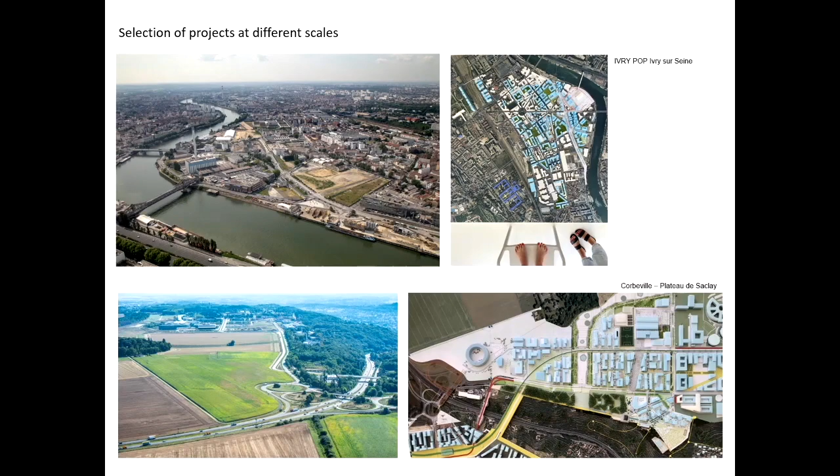I'll show you the different types of problematics we have, what makes it interesting for me. This is Fives Cail. This is a ZAC too, of 25 hectares, with 17 hectares of one building, a former industrial building that the city bought and wants to transform into a new neighborhood. The first phase was done by AUC, another urban planning office in Paris, and we won the second phase. How does it work? When you do an urban project in Paris, we only have a contract for, let's say, maximum 12 years, and more now, or then 5 or 6 years.

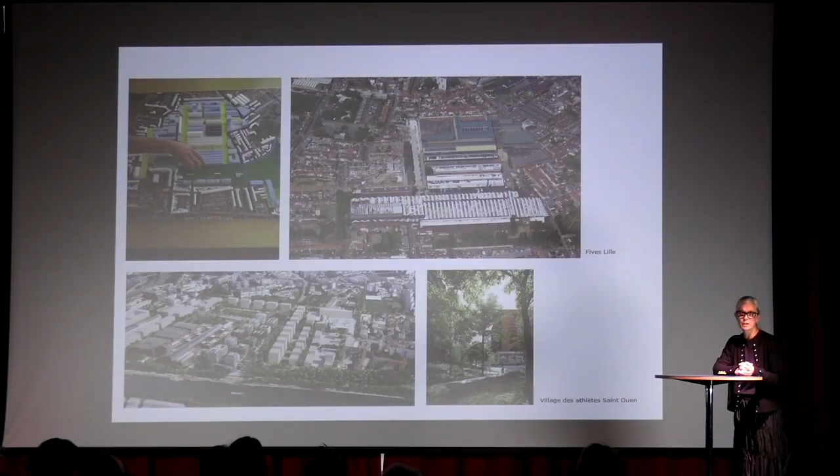And then below, it's another scale - the scale of the Olympic Village. We are an urban planner and architect who were coordinating through a competition, and now we are working on site with 6 architects for doing this city block.

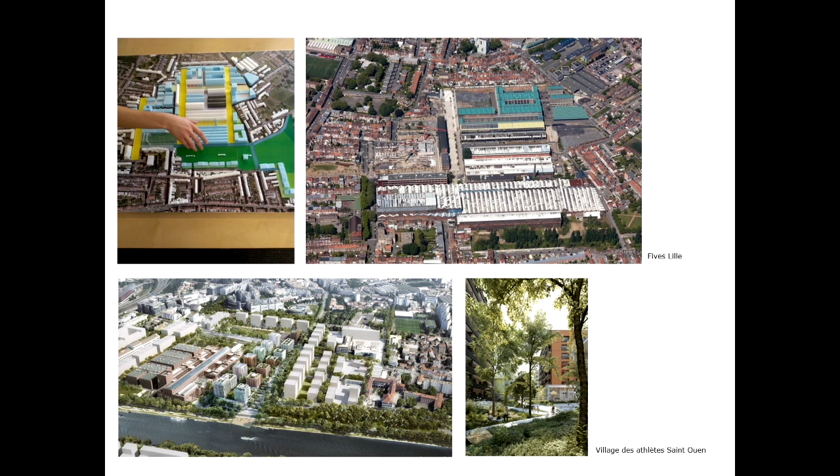And this is the whole part of the Olympic Village, and there is another part on the island. This is where I am coordinating architects as an urban planner, but within the plan that was made by Dominique Perrault's office and Agence Terre doing the landscape. I was then working for 3 private promoters to make this project. And then we are also working on an architectural scale.

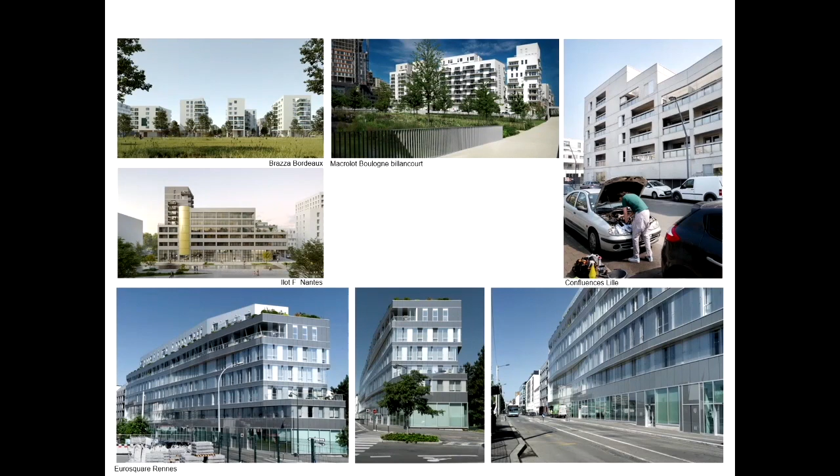I think it's important to know that, and I think it's important we do both, because I think the attitude of an architect and an urban planner should be the same: to try to find the potential of the site, to build up possible scenarios, and not to determine the space, but to make sure that people can inhabit their space like they imagine it. I discovered after 1 year at Villa Medicis that, in fact, we do not use space as it was designed for. We always detour space and we always appropriate space. It's also a sort of way of being resilient.

If I now come to Ile de Nantes and the process, Maria asked me to explain how it works, not just the project. So I made this lecture in a way that you can understand what we did, how we did it, what tools we had, how many people were involved, and how we worked.

So I call this lecture Designing Dialogues, because I think urban planning today is about designing dialogues. It's about negotiating, about talking with a lot of things: with the layers of the city, the context, the physical layers, the framework below, the physical context, the people, social, economical, political items—all important to build the history of the site—and also with the different actors involved with the site.

Especially in 2010, we started to think about water management and about continuity of ecological systems, biodiversity. But today, with the ecological transition and climate change, we've reached a sort of acceleration where we now have to take care of the CO2 footprint, which we have to reduce by 50%.

That has major changes in the form of the buildings and the way you construct, and also the construction price and the quality you want to have as an architect building the urban environment. And not to forget the people who are living there, and how you make an inclusive city. Perhaps this isn't the issue in Norway so much, I don't know, but in France it is—we have a big gap between immigrants, very poor people, and the people living in Paris who are paying a lot of money for their apartments.

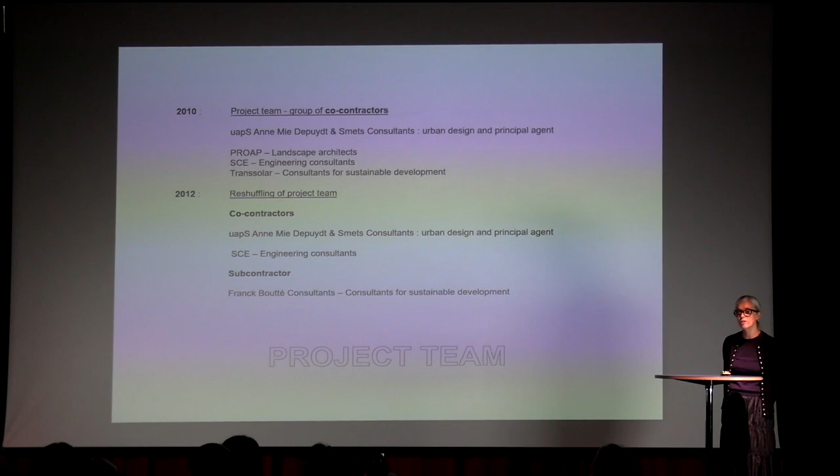And I became, with the office, the landscape architect, which is really weird. We had to do all the public space, but we didn't do all of them because I refused. We did competitions afterwards for other landscape architects to fulfill the role of the public spaces. So after the reshuffling of the team, we went on and did the project.

And then the Samoa - what is the Samoa? This is very important for you. It's an organization, a society that helps the metropole of Nantes do urban planning. They have a budget, a team with a director, a deputy director, project managers, very young and interesting people. And they have a budget to buy the terrain and sell it to private developers, ensuring the urban planning will be good.

They have a budget called the ZAC, and this budget is the budget for the public space. In order to get that budget, we have to respond with density, because when you sell your ground, you sell it according to the number of square meters you're going to build on it. So the money you get from the ground helps us do the public space.

What was the major change between our period and that of Chemetoff? What Chemetoff has is a very good issue, and what we also do is start thinking urban planning from open spaces, and we start to build a lot of these open public spaces. He had the budget to start doing a lot of public spaces without having constructed or sold terrains. But then in our period there was a crisis in all of France, and the state didn't give much in subventions anymore to the cities. So through this crisis, we had to first do the private buildings before doing the public spaces. That was the major change.

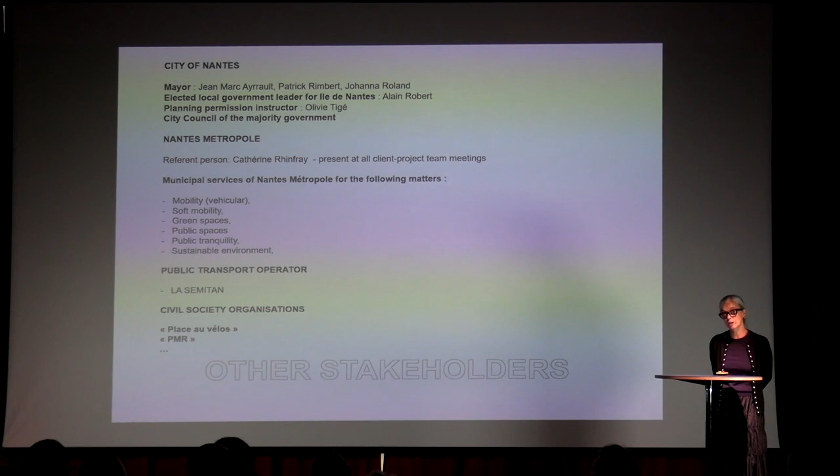But it's not only the Samoa that is our client - we also have to deal with the city of Nantes and Nantes Metropole. I had three mayors during this period: Jean-Marc Ayrault, and when he became prime minister he was replaced by Rimbert, and then Johanna Roland got elected. Rimbert was very much into the project, the strategic planning. Johanna Roland is less present. It's not the same way today of dealing with politics as it was before. You have to know I met Ayrault every month, once a month, in his cabinet, just to tell him the evolution of the project and how it went.

You also have to deal with the elected local government leader for Ile de Nantes, who hears all the problems of the inhabitants and relays them to us, and a lot of other people, and also the municipality services. That is very complex - they all have their own rules, they are contradictory, it's like a state within the state, and they are not very easy to work with. And then there are all the people of the public transport and the civil society organizations and associations.

So I was 350 days in Nantes. I did 1,120 meetings - we counted them because we had a Google planning for the 6 years, and it was filled in.

We did a lot of work—sometimes I didn't eat, and sometimes I had to eat during meetings. And the last one is just like this, 100,000 hours of TGV. Every 2 weeks, I was at least 2 days in Nantes, and we worked a lot on the project.

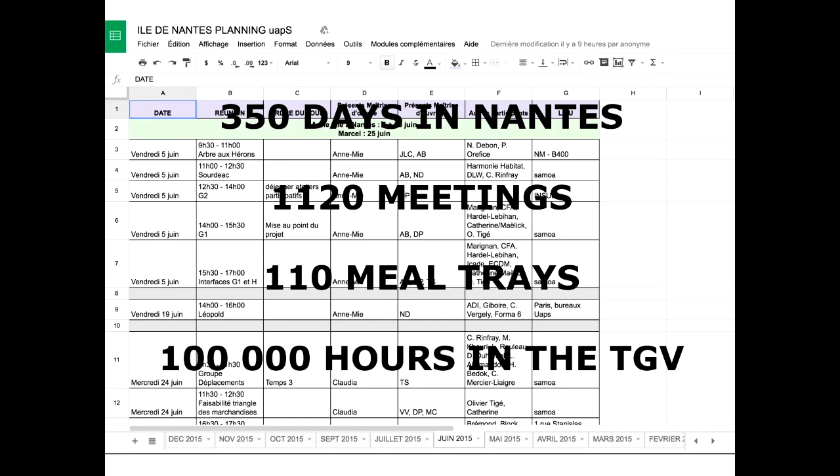So it's not like urban planning where you go once a month, you do a lot. We also had an attitude: if you have to talk and discuss with all these people, you have to negotiate, be smart, and understand what is tactical and what is strategic, and how you deal with that—whether it's with your client, the politicians, Nantes Metropole and all their services, the private developer, or even the architect.

We also have a method that is research by design. I think this is the influence I got from OMA. We produce a lot—we do a lot of producing.

We build a lot of scenarios just to be sure we can discuss them, and we do it through scale modeling. We work only through models—this is my pencil and my eraser. We make models at one scale, 1 to 1,000, 1 to 500, and even 1 to 200, to make sure people understand what we want to obtain as a quality for the global environment we are doing.

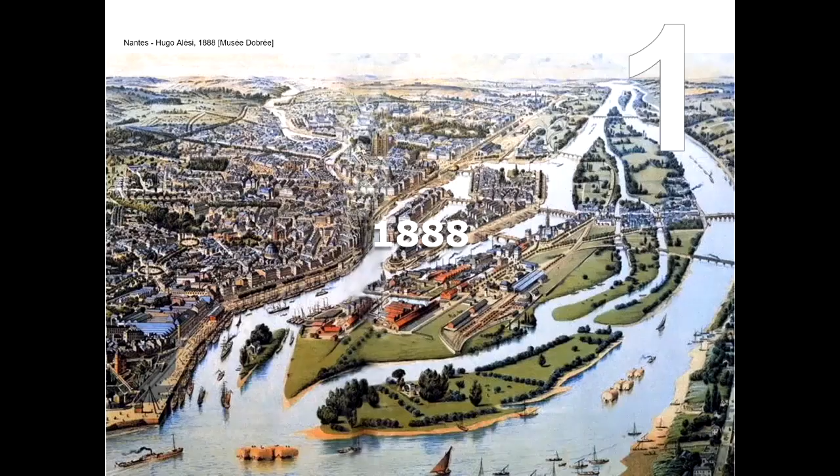One of the things that was important for us and for Marcel, by going there on the island to respond to the competition, was to try to understand how the city came to be like it is today. What happened before, and why do we have this weird combination of urban forms, public spaces and disconnected things?

So we went back to history, which I think Alexandre Chemetoff didn't do. We discovered that the island was actually several islands. We found on this map that there was an agricultural structure here, that the bocages followed the direction of the water system, and that the site already had the former industrial area on the west side, and that the island was on the periphery of the historical city.

Further on, we even discovered that some of these arms of the Loire are now infrastructures, like the highway, or the only street that goes diagonally. We discovered through photos how the site was changing.

You see here the former hospital that is now going to be placed on the islet itself, and that everything was very, very industrial. You also see how, through filling up the terrain, the city tried to conquer more land and extend in '34. And we see the first big streets cutting vertically through the island.

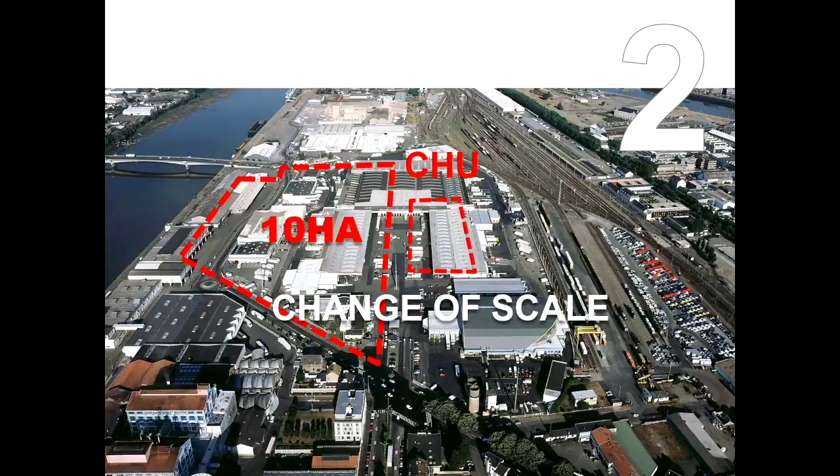Especially when you see it in these models—you'll see this is one of the latest models we did, where we put the hospital over there. But it doesn't mean it was there all the time. In the beginning, we had to place it over here.

That's why we worked for 2 years on 2 sites. When we were discussing having the project on the site in the middle of the island on the west side, with a very dense city, and then filling up the rest, Marcel and I wondered how you can do a big piece of meat—we call it an escalope in France—of 350,000 square meters. We will cut the site in 2, and that is not possible.

So we needed to work with the hospital people doing the program for the next competition to get through it, to make a hospital where you have the blue foam, and buildings around it connected to the hospital but also connected to the city.

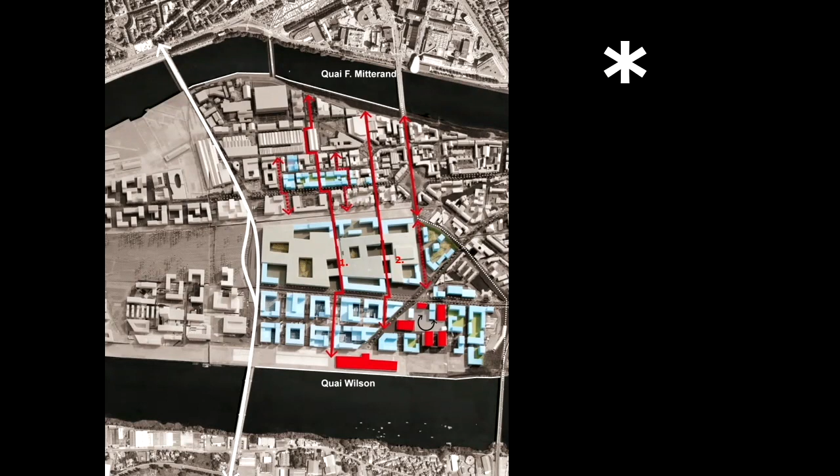We had discussions for more than 2 or 3 years, and it was really difficult to get along with the hospital direction, the staff, and even their consultants helping them build up the program for the competition. But what we also did, which is one of the methods of the project...

We proposed with Marcel, when doing the competition, that since you work with an urban planner for 6 years on such a big scale, it would be good to have a circle of quality. A circle of quality means we told Samoa we need to invite specialists who can criticize our plan at the moment—see them at least 2 times a year, so they can see what we're doing and give us their advice. So it's not only ourselves; let's see what others think of our strategic planning.

So we got Henri Bava as a landscape architect, Jean-Louis Subileau as director of another company like Samoa in Euralille, and we got Bourdin as a sociologist.

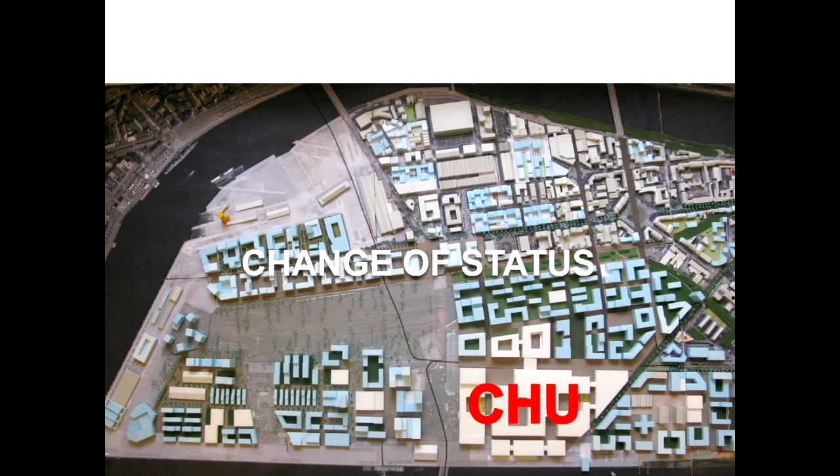Yeah, they said, what is your plan B? Because the protocol between the hospital and the city of Nantes was already signed. The terrain was limited, everything was ready for getting into the competition. And then what we did is with Jean-Marc Ayrault, we asked him, shouldn't we bring the hospital back to that place in front of the Loire if they do not want to cut the hospital, and if they don't want to make the passage in between, at least we are in front of the river. As a scale, it will be better.

We can build the city and continue the city here and make sure that in the middle, it is totally a normal city, a neighborhood. Perhaps this is better. And he said, okay, you can do that.

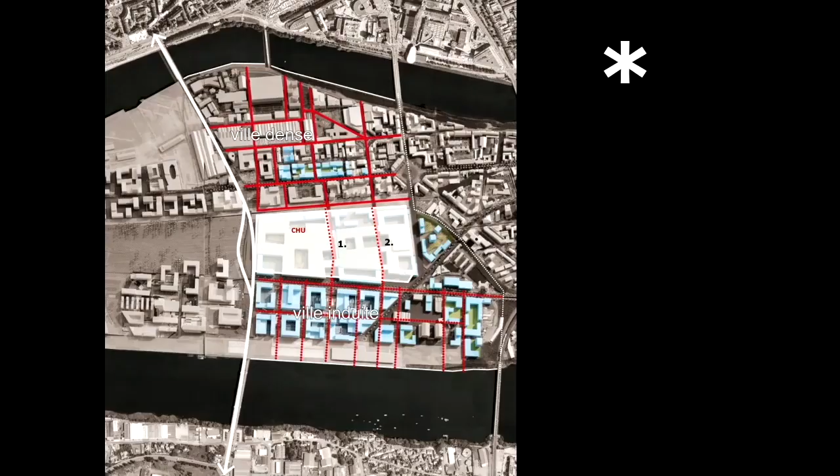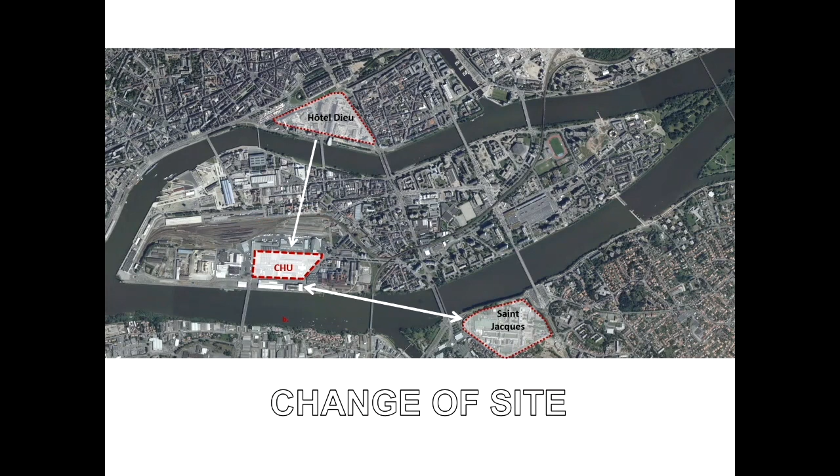We made prescriptions. It is a booklet of 100 pages, urban and architectural prescriptions for the people doing the competition. These are handmade sketches I did because the people of the hospital thought that when it's hand drawings, it's not so fixed. And they thought that if you do it in Photoshop or Illustrator, that means it's totally...

You can move it. And when it's a hand drawing, they thought it was better. So I made the whole booklet by hand drawings. And so these are the type of prescriptions we are giving to the architects for the competition, and to hope they will follow them, they will challenge them.

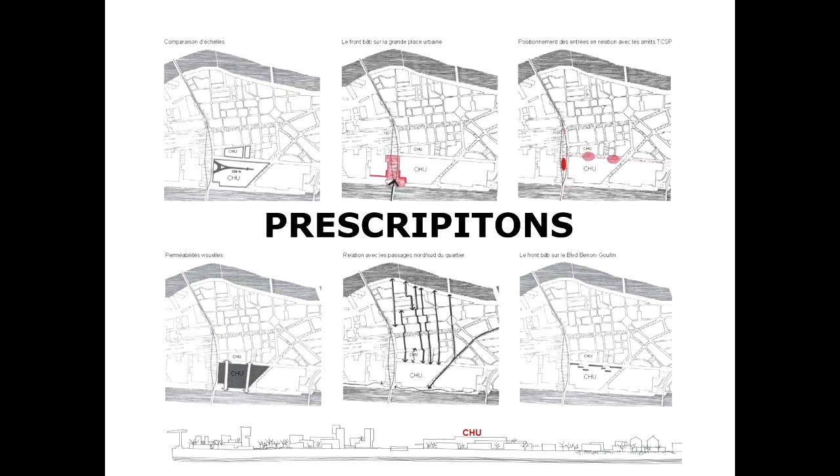And hopefully a Belgium team with a French architect, Pargade, and Art and Build, a Belgium team, won the competition and made a hospital of different buildings with public spaces in between, with as much as possible a little bit of landscape, knowing that below you have the parking levels, not the technical level, but the parking levels.

And so what I did afterwards was monitoring the project until the permit building. I had to check that everything they proposed during the competition was still there as a quality when they were giving in the permit building.

A third item of the project is transition. We had to make a transition between this big scale project and the rest of the city, especially if you look to the typology and the granulometry of the buildings.

So we thought that the Metropolitan Park was good for several reasons, because this park would be a space at different scales, and would be the first big green space on the west part of the island, which is the most profound, where you have the biggest depth of the island, 1 kilometer.

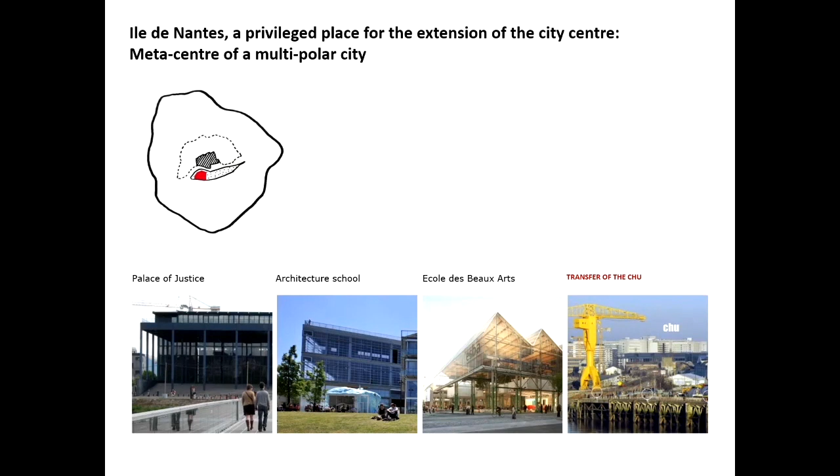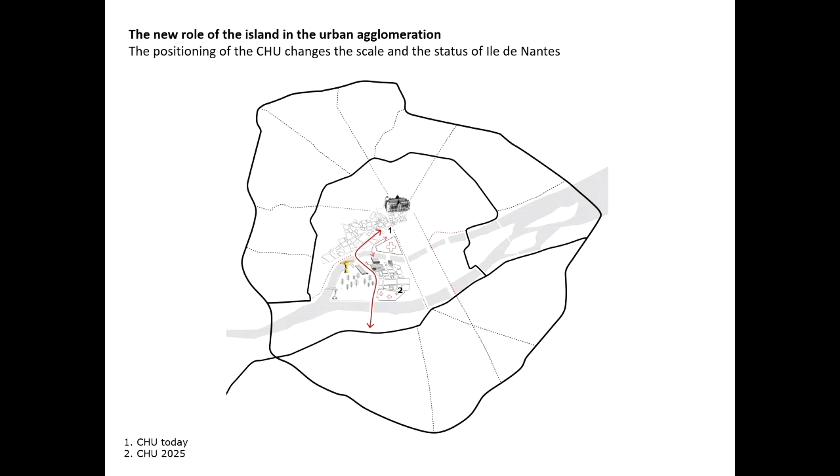That means that in fact the island became the privileged place to do the extension and the complement of the city center, which is very small if you look at it in the agglomeration. And that means the island got a new role, and the island was not something far away, but something different. And it happens so that you need different programmation.

So we need to think about what type of housing, what type of programs, what type of equipment, what about what is happening on the east side in relation to the west side? How should we connect with the projects going on the other side around the railway station today, the project Euronantes? And what about the connection with the city center?

So we said that we were building like a sort of a multipolar city on the scale of Nantes, on the city itself. And these are drawings that are just showing how important this park becomes here on the west side, how important this place has to be connected with the city center, and how we also need connections east and west to make it work.

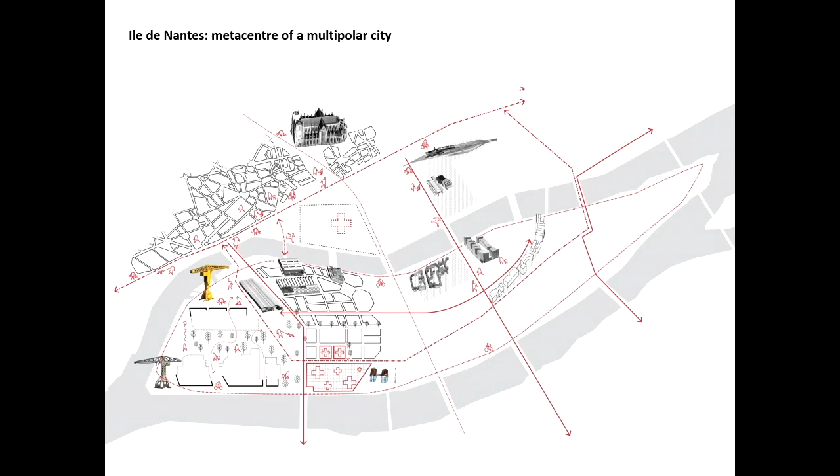So that is how I introduced accessibility, because putting a hospital that is in fact the reunion of all the hospitals in the agglomeration of Nantes on one spot means it has to be very accessible.

Accessibility is also talking about public space. So we thought it was important to restructure the whole road network and to make sure we had straight connections. For instance, this connection today doesn't exist. When you come into Nantes, you have to do this.

And what we did was get a straight connection so that the new neighborhood we were planning on the west side could just be a neighborhood with a slow city where you have more alternative mobility that is important than cars. We also thought we needed to reconnect the East-West movement, especially with public transport.

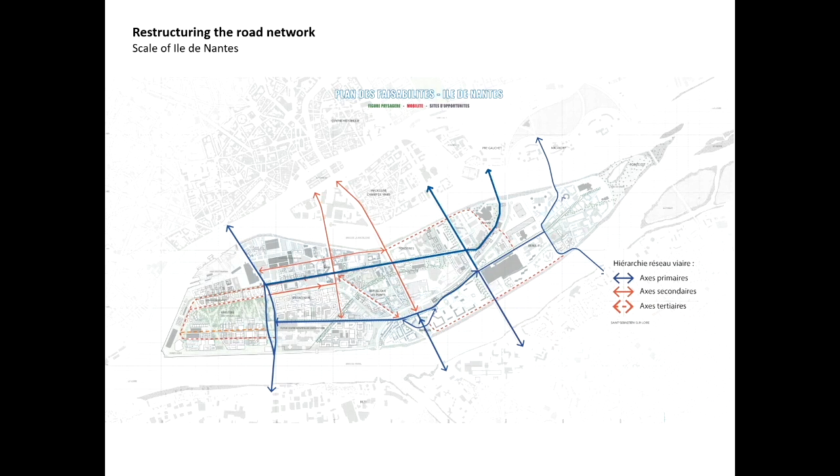This is very important because we used the need for public transport as a way to structure the site and as a way to create public space from facade to facade, and to change the environment of parts of the city that were not taken into consideration before.

And you see also that we proposed not only a bus that has its own path to cross the island, but also a new tram system.

And we also produced other lines of trams so that we get a network and not only a star system, because when you look at the agglomeration and the transport of the tram today in Nantes, it's a star, and there is one connection point for all the lines.

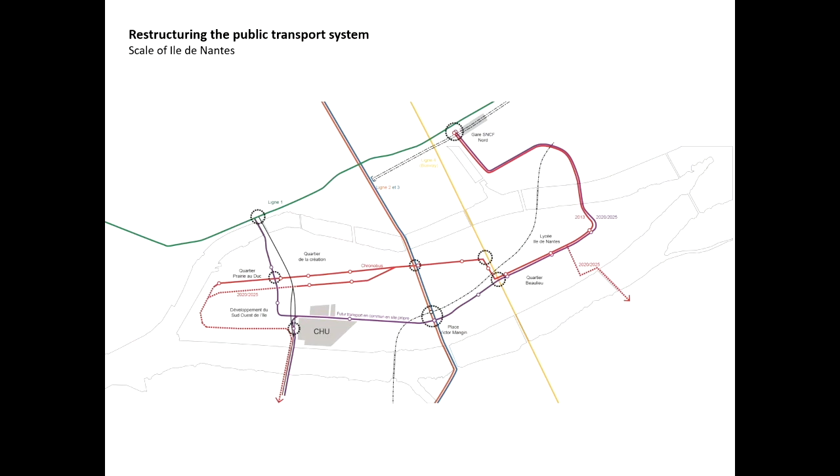And by doing this, we were thinking on the scale of Nantes and this agglomeration, and we were putting in a network.

And so the way of getting public transport through the agglomeration was much more organized. So what we did on the island was not only for the island, but has an impact on the whole city. So it means that we were looking at different scales, and we were always considering what would happen with our intervention on the scale of the island and on the global scale.

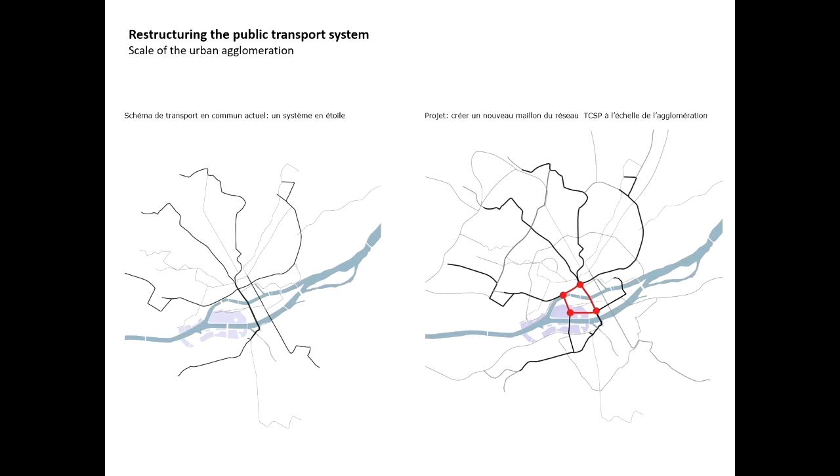And then the last part of our cahier de charge, what we had to do was develop the Southwest, which was a new scope of intervention, a big terrain that was a former industrial zone where a lot of industries left the island and left the terrain. So the Samoa bought it to develop it.

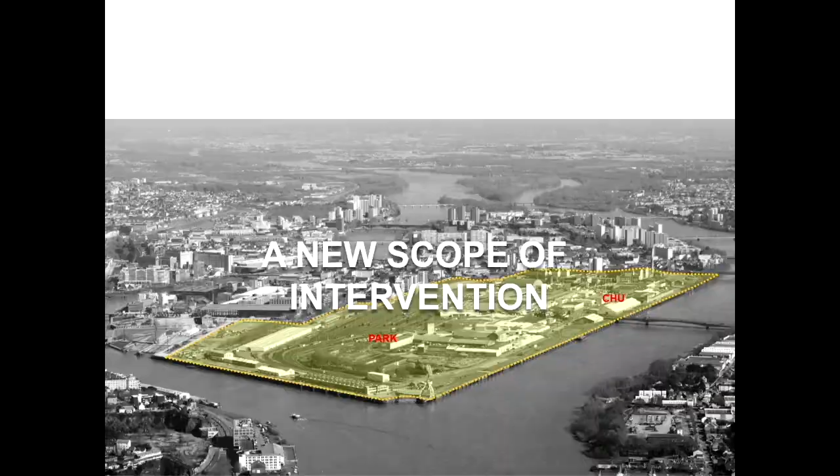So also that was important for us to see what was happening below. And so we had to think with the project of Reichen, of Bas-Chantenay, and of Obras on Pirmil-les-Isles, because we were not only taking into consideration what was going to happen on the southwest of the island, but also on the total west of Nantes, where we would have 203 hectares to be developed in the coming years, because we made the strategic planning for 2030.

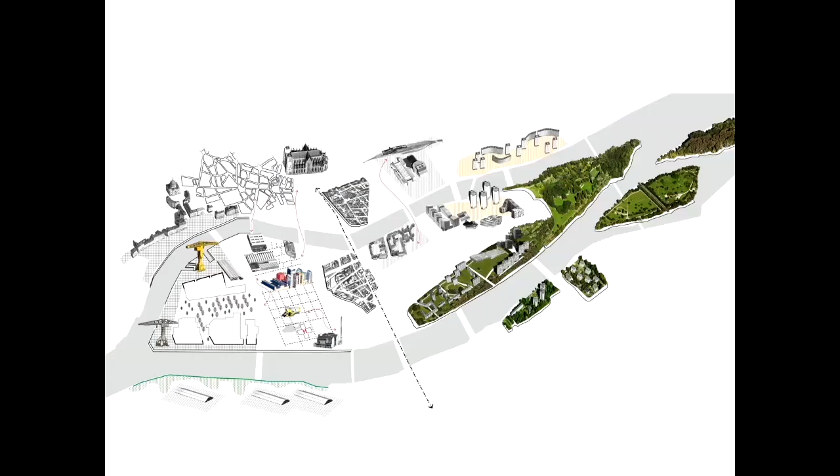And so that means 25,000 new inhabitants over there. What is important is what you put on the different sites. So we looked for coherence, and we adapted our drawings. We tried to see what others were doing to make sure we got connections between our planning and theirs. So we made all these maps to try to understand and show the city and the politics, how important everything became, and how the metacentre and its extension was really the big complement to the historical city.

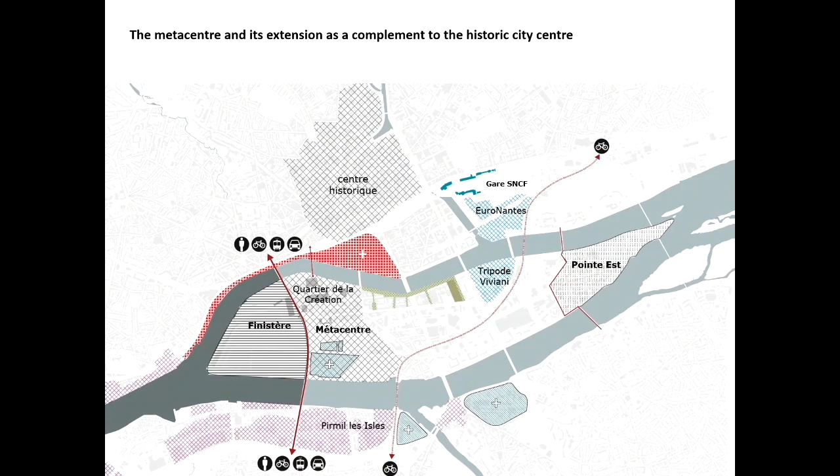And then the Plan Guide changed, and we called it the Plan des Transformations, the plan of the transformations. We did it with purpose. We upgrade this plan every 9 months. This plan is not a master plan.

If you look closely at the plan, it shows the structure we made, that we called the landscape figure, coinciding with the public transport. This plan will never define the plan on its own. You saw the model - the model is a working model, not a presentation model. It's a discussion model to see how dense or less dense, and how you can develop a site. But that doesn't mean the model will last till 2030 or 40.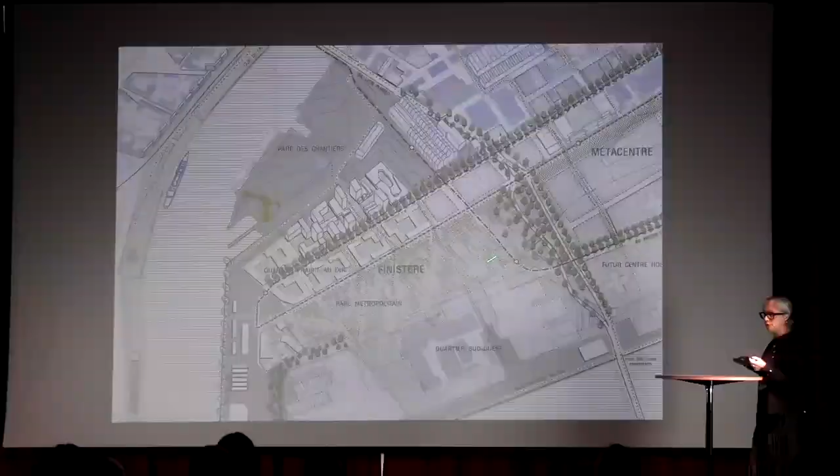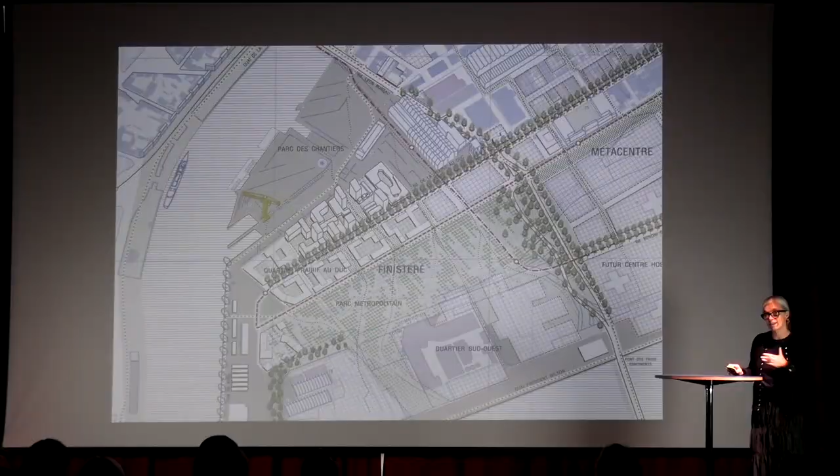What we did was find a way to design a strategic plan where we show the sites with the grid where we will intervene, where we superpose what is still going on, so that people are not afraid and don't have the feeling that they have to leave the site very early, or that the people working there will be unemployed.

When we discussed the planning with Samoa and they approved what we did, and when we worked with architects on the permit building, then we raised it up in 3D. And when the plan was changing, when some sites were disappearing because we thought it finally wasn't worthwhile to develop certain sites, we changed the plan.

So this plan was in effect a plan we worked on for 3 months, one person full time, just to understand how we could translate the way of doing urban planning through the years and how we can take into account the timing of a planning.

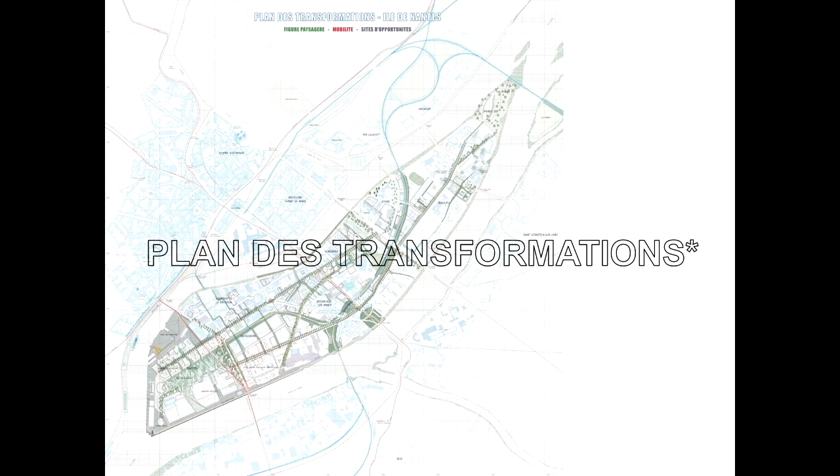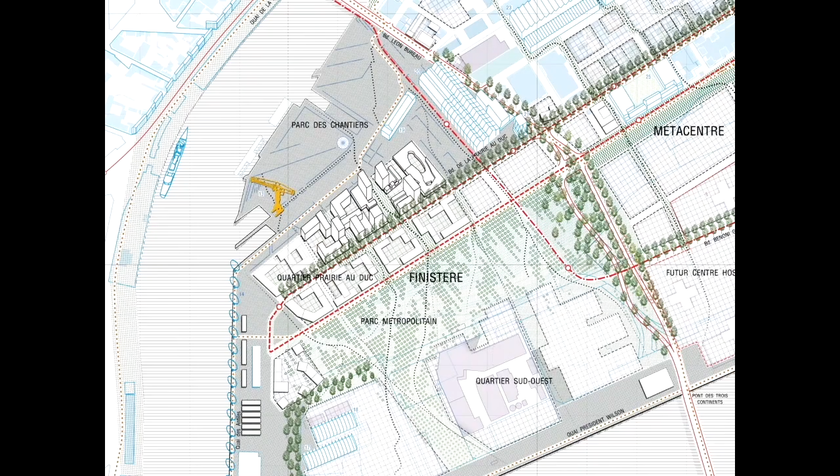This is quite important because the whole plan was structured by this landscape figure, what you see here. This landscape structure is like the structure that everybody will build through time, that Jacqueline and Claire are building now again and it will stay till the end. But the sites around it, the perimeter of the site, can change because of opportunities, because of things we do not control.

So this landscape figure was also for us a way to federate the 7 districts you saw in the beginning and make sure they got connected, because the landscape figure is also a figure where you have public space - the infrastructure we needed to build to make the hospital accessible also helps us create public space, give green spaces, give playgrounds.

And make sure that people can meet each other in their neighborhood. That helps us keep the character of every district and make sure that when we work on architecture projects, we don't use a generic concept. I think urban planning should stop using the alphabet for making plans of buildings - we see too much O and H and E and F and whatever.

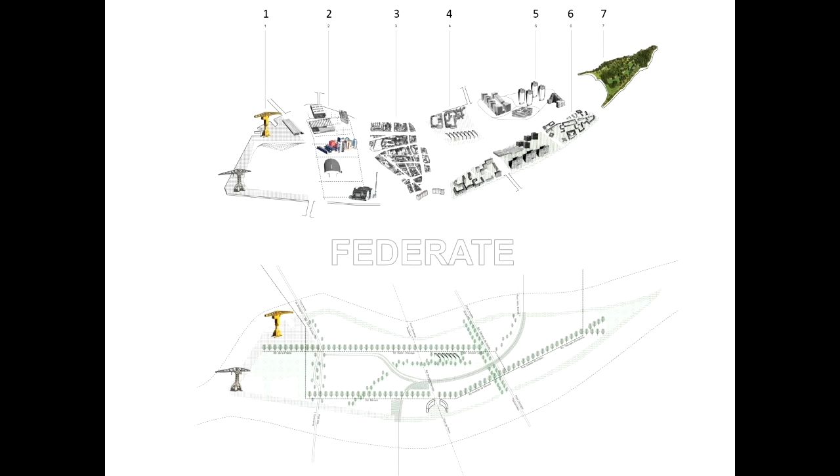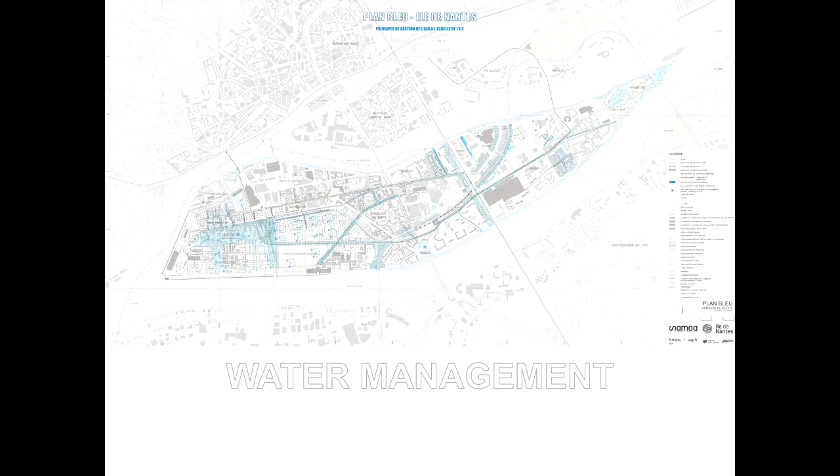That you can really try to find a building form that responds to the site. That doesn't mean you're doing contextualism, doesn't mean we imitate what was there before, but you try to make it more contemporary while not losing the aim or the character of the place you built in. The figure is also a way to arrange water management, have ecological continuity, introduce biodiversity, and generate public space - public space where you didn't think it could be.

And so we did a lot of them. I won't comment on them all because I don't know if my time is up. But we made promenades, we did some minor interventions, we put some blocks on a former building, and we hope the skaters were coming.

We make sure that adolescents could have spaces they can appropriate without determining them in spots they are not controlled by their parents and nobody sees them. We make sure that you can walk and you can bike and that you can just discuss, and that there were public furniture. So there was the whole idea of making the city active and intense, and not only dense, because I think density has to be translated by intensity and is also a way of perceiving things.

And we also challenged the norms. The first photo you saw of my team was when I was very motivated, ambitious, trying to find new pedestrian ways and new ways of designing the white lines on the streets. I learned by heart the interministerial regulations: when do you need a stripe, what is the thickness of the stripe, etc.

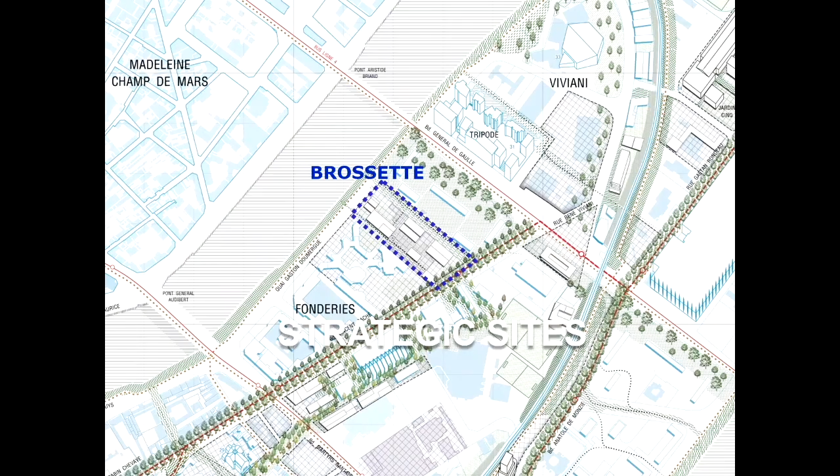Finally, how did we work with the strategic sites and with the private developers, promoters as we call them, and their architects? First of all, for the strategic sites, we did Brossette, which is 1.7 hectares. This is a project where we had to make a feasibility study for housing, combining the typical building blocks that are not social housing but free housing from the 60s, with office buildings from the 80s.

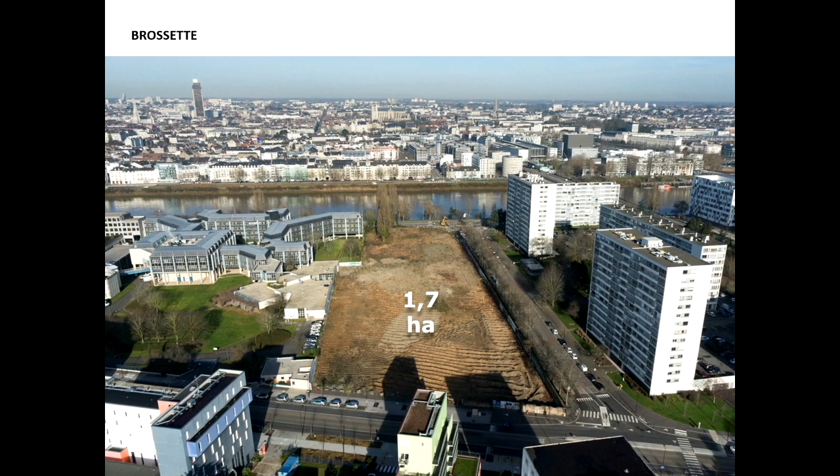How do you do that? And how can we build 30,000 square meters on that site? So someone asked us, and we came with our models, with all the ways of putting scenarios in front of them to see how we do it.

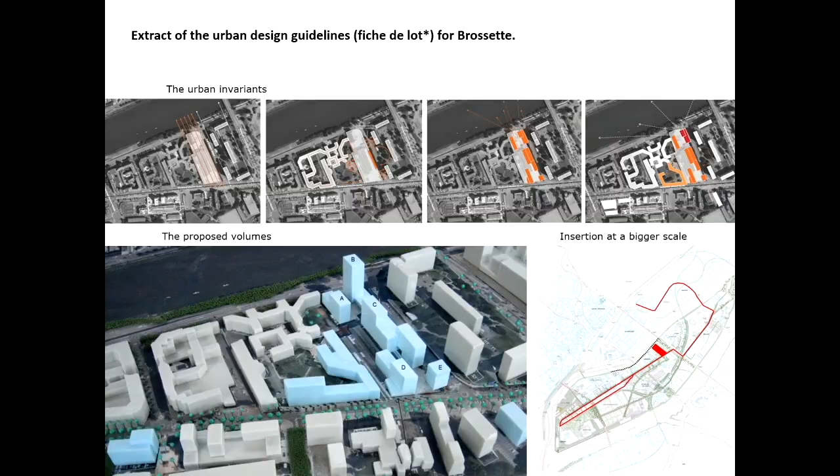These are like an extract of the urban invariants that the architect gets with the models, as guidelines when he does his project. First of all, there is no competition — the competition for architecture is only when it's a very important site. Mostly we invite 5 architects, 5 architectural offices to come, and they get selected.

I have the possibility to put together a list. All the architects become my best friends in a way — at Christmas I get a lot of presents, books and portfolios, because we make lists of offices, international and national, that we think are interesting. According to the typology of the site, their style, and their way of working, we propose them to the private developers. The private developers also come with their own list, and I have the possibility to refuse some and replace them with others.

So we start to negotiate with the list of architects, and then I can also ask the private developer to give a full mission to the architect, so that the architect can also do the control on site, and that he can have all his engineers within his team, not the team of the private developer doing the engineering.

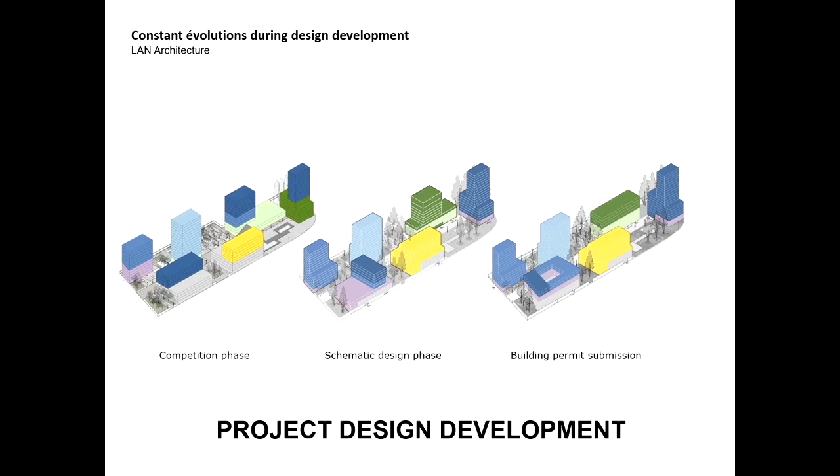So we always combine, let's say, an office that is already established with a younger office to make big projects, on all the urban projects I do.

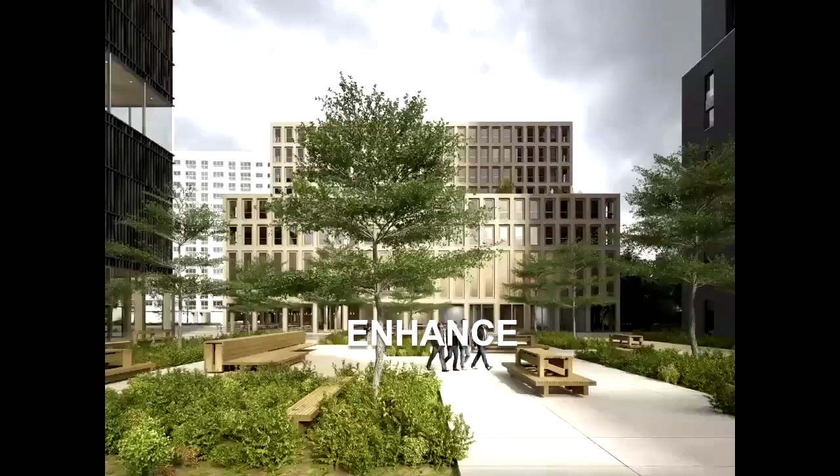So this is the public space that they made on a private site, paid for by the promoter, but then given back to the city, and the city will then clean it and take care of it over time.

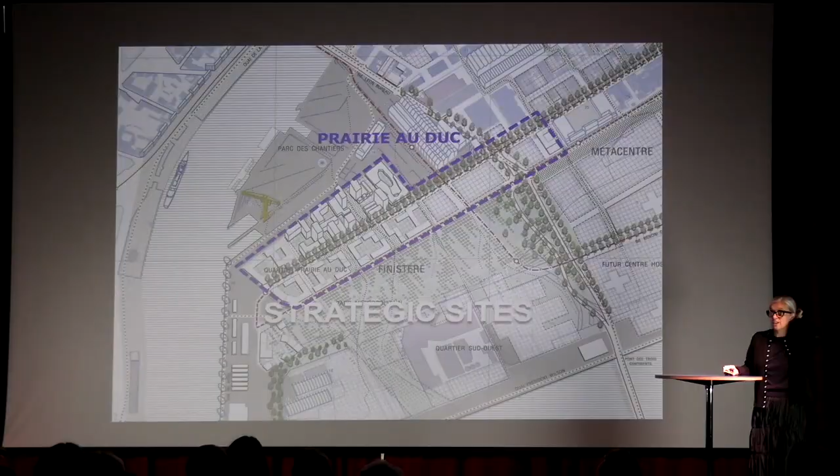On the strategic side, one of the strategic sites is this neighborhood of more than 100,000 square meters. What's interesting for me is that I extended my role as an urban planner, not only to control volumes, but also the quality, not only of the architecture, but the content.

And I'm married to a promoter. My husband is a promoter. And when I discuss with promoters, he's always afraid I will have no job anymore, because I'm quite tough and I ask for a lot.

I said to him, okay, I'm going to ask for 2.70 meters ceiling height, free ceiling height in the apartments, because I'm tired of 2.50 meters, especially when you have bedrooms of 9 square meters. Our apartments are very, very small. And I will ask them for this and that. He said, oh God, don't do that, you will have them all as enemies. And I said, no, I will do that.

I said to the Samoa, listen, can I just meet one of these private developers you work with, so I can discuss urban planning and our ambitions with them, and ask them what they think about this and that? We did that in a very informal way, and all these people were very involved and surprised, but not saying no. They were rather interested.

So what we did afterwards, to make it more serious, we did urban form workshops, a translation from French. We did a casting: we asked people constructing social housing, private developers, and architects to send us a motivation letter. It was done in association with the Samoa and the House of Architecture, to send us a motivation letter to take part in our discussions about housing tomorrow.

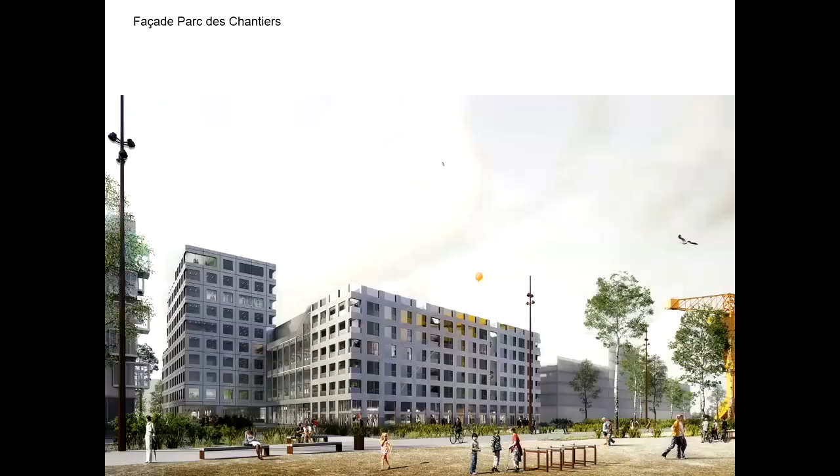So in 2011, we started with that, and it was a big success. We got a lot of promoters who had to do this, and they were so proud because Nantes is so well known. They were proud to be selected to develop a project with all this ambition. But what they didn't know is that they had to keep it up till the end, because we were controlling it.

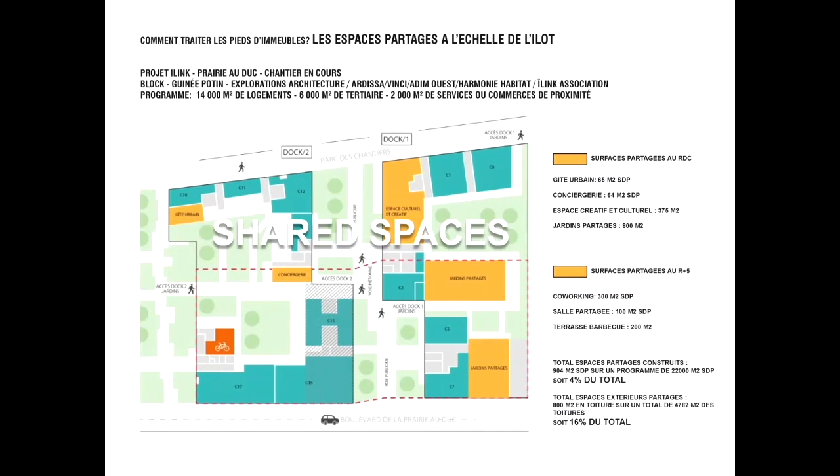We did a lot of work figuring out how we could have shared spaces, shared conciergerie, cultural spaces on the ground floor, how we could have transitory urbanism—what is now normal, and even dangerous, because promoters use it as a recipe to get work. But you can't do it everywhere, and you can't do it the same way every time. It's quite specific, but we did it and got it done.

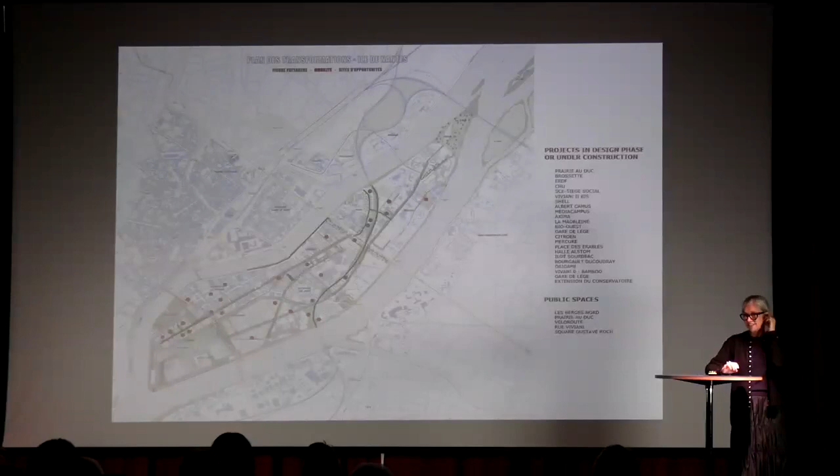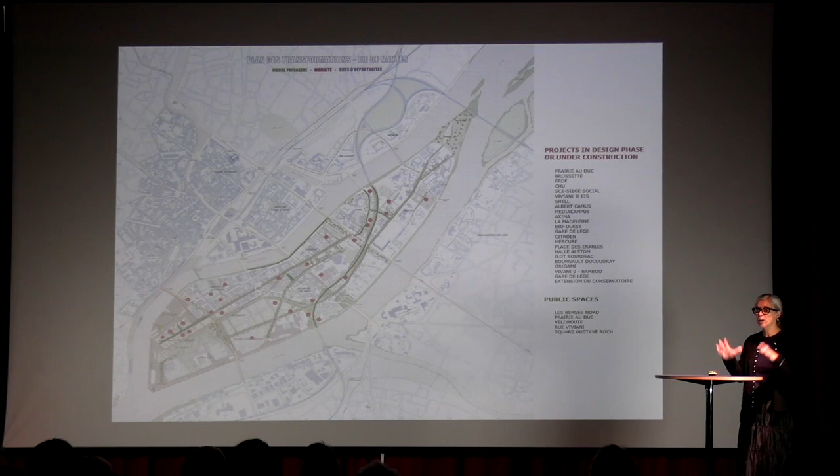We did it for, I think, almost 60 projects in 6 years. It went very well and very fast because there was a sort of boom and dynamic that is now less present, but that's what we did in those 6 years. I hope it wasn't too much, and that it was clear enough. That's where my story ends here.

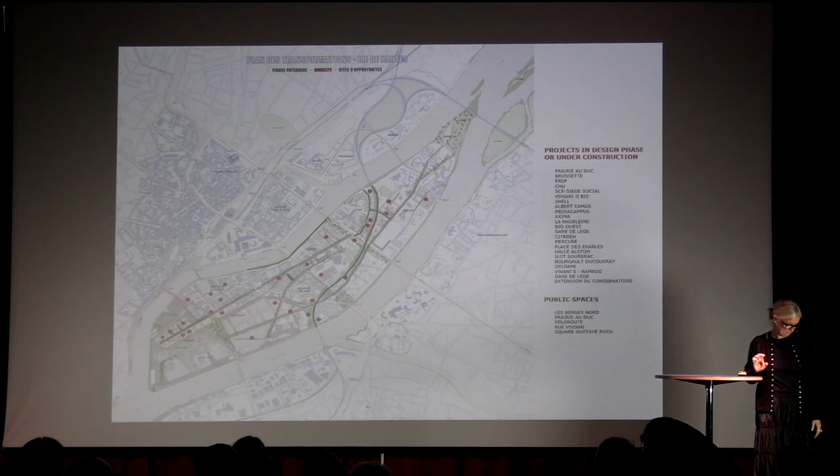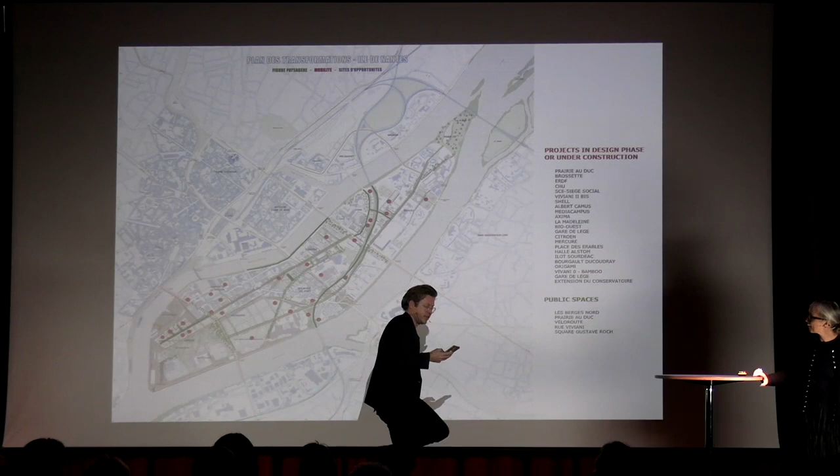Thank you, Annemie, that was really exciting to hear. I think it's particularly interesting because Ile de Nantes is such a reference project, a best practice, particularly within planning circles. But seeing this presentation, there are things that are, as you pointed out yourself, extremely important, like the monitoring aspect—that's really a tool on the large and small level to help ideas develop.

Into more than competition renderings, etc., and become consistent projects. You have this ability, or emphasis, on situating the project within the larger realm of the city or territory, so you can develop the city without necessarily suffocating or challenging other parts of it. But what I also find is an extreme emphasis on, and responsibility given to, the involved designer—just from Chemetoff's big narrative, and also for Marcel Smets and yourself—where you have a lot of power, a lot of leeway, and also an extremely demanding position that requires you to take on huge amounts of responsibility.

You seldom see a designer in the context of Norway get that. So what I would ask you to reflect on shortly is: what is the translation potential of the Nantes model, or règle du jeu? What would you bring forward to the next project, or to a context like Norway, and what was so specific about the extreme amount of energy poured into Nantes at that particular time?